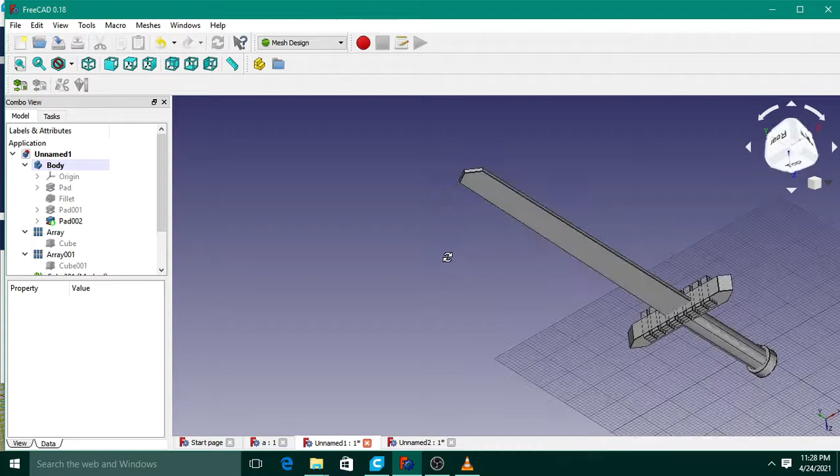In this video, I have made a sword which was used for submission of assignment 2, week 3, in the DIY project. I have created this sword using various operations.

It includes a pad operation which I used to create this handle. Along with the handle, I created this upper part in continuation, then used a pad operation to make it a complete solid, and then used a fillet operation to make the handle smooth so it's easy to hold.

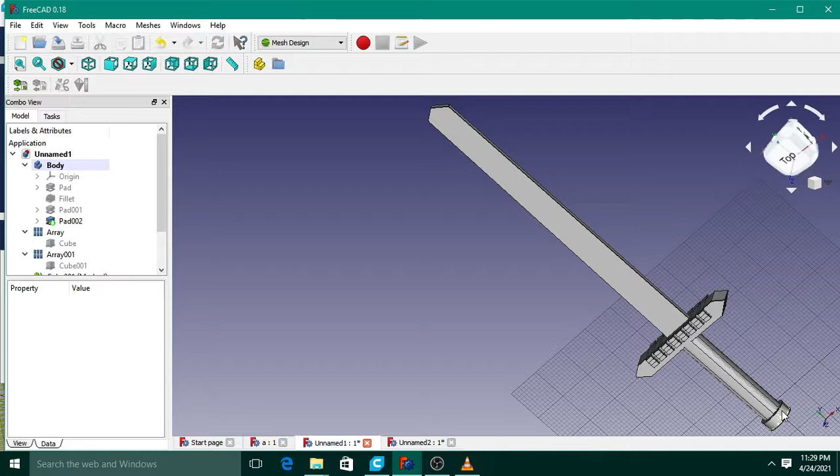After that, I created this bottom cap of the handle using a pad operation, where I created a circle and then made a complete solid of it using pad operation.

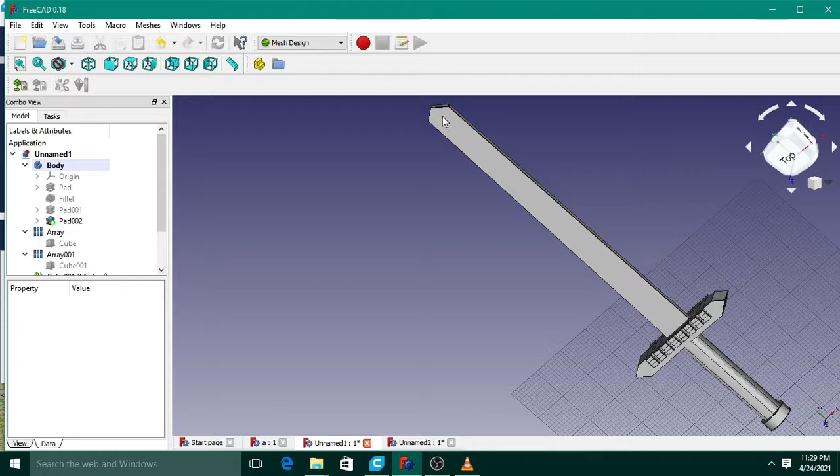Then I created this blade, again using pad operation, where I created this shape using lines and then used a pad operation of particular thickness. The thickness is very small, as you can see, and using this I created this blade.

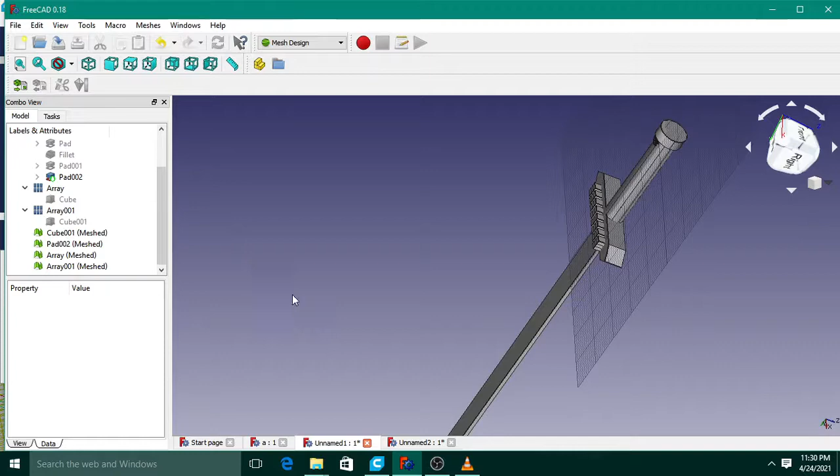Then I meshed this all, and saved this as an STL file. After saving it as STL, I opened Cura and opened this file, and then laid this sword flat on the surface using the lay flat option.

Then I changed the settings in order to make the printing time less than 4 hours.

I made the infill density 100. I used the draft print profile, with layer thickness less than 0.2 mm, and the printing speed set to 55 millimeters per second, which is less than 60 millimeters per second as asked in the assignment.

After doing all this, I also set the printing temperature as 205 degrees and the build plate temperature as 60 degrees Celsius.

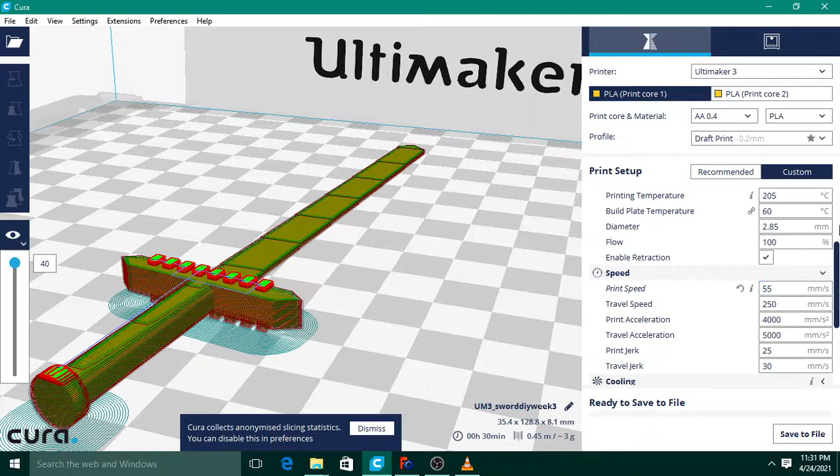After doing all these settings, I got a printing time of 30 minutes. Also, my dimensions are within the limit, which was 150 by 150 by 150 mm, and my dimensions are 35.4 by 128.8 by 8.1 mm, which is way under the specified limit.

Using all this, I created this, and then finally saved it as a file, as a G-code.

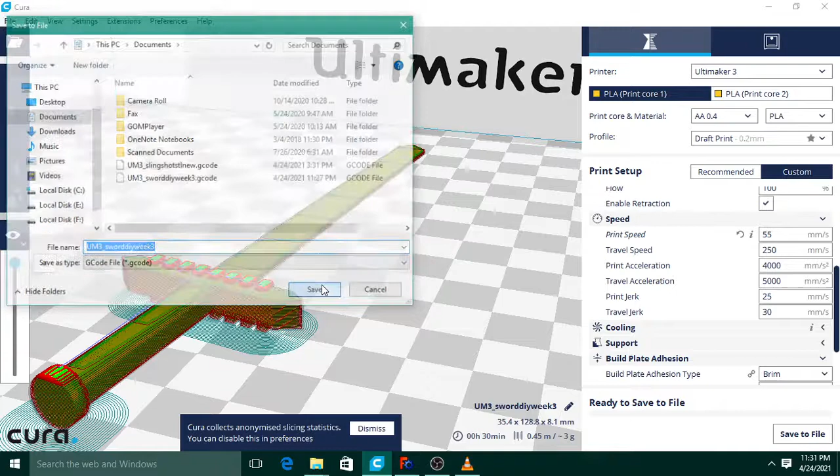And that's how I got this project, this assignment, done. Thank you, sir.